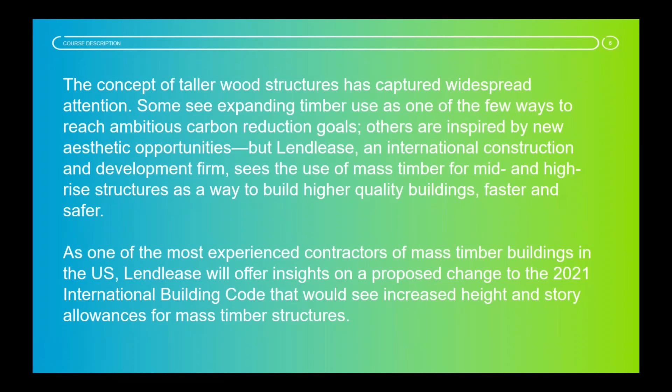So I'm with Lendlease, and we are a multinational company, and our North American headquarters are based in New York, and we do a lot of development, construction, and we do community development and infrastructure development and investment as well, all around the country, and predominantly in a lot of the large city markets, such as New York, Chicago, LA, San Francisco, Boston.

And here's a sampling of the projects of what we've done in the past all around the country, ranging from mass timber to the Statue of Liberty renovation, Citi Field for the New York Mets, the Grand Central Station restoration, Museum of Natural History, high-rise, low-rise projects, everything in between. Lendlease has developed and built quite a lot of those over the years.

And the next slide shows a location of where our offices are around the country, and I am based in Nashville as part of our Timber and Innovations Group, and we support all of the timber initiatives utilizing mass timber around the country for our regional business units. And then also our Nashville office is part of our P3 partnership with the U.S. military, where we have our privatization Army lodging program, and we service all of our military projects out of Nashville as well, with services from everything from design to development and construction.

The next slide shows a location of the projects that have either been completed or are under construction or about to be constructed utilizing CLT for the U.S. military. Two years ago, we completed the first CLT hotel in the United States at Redstone Arsenal. Last fall, we built a hotel at Fort Drum, New York, and then in October we will begin construction at Joint Base Lewis-McChord up in Tacoma, Washington. Next winter we will be in Fort Jackson, South Carolina, and then in 2020 we'll begin construction of several hotel buildings at Fort Bragg, North Carolina, all utilizing CLT as the primary structural material.

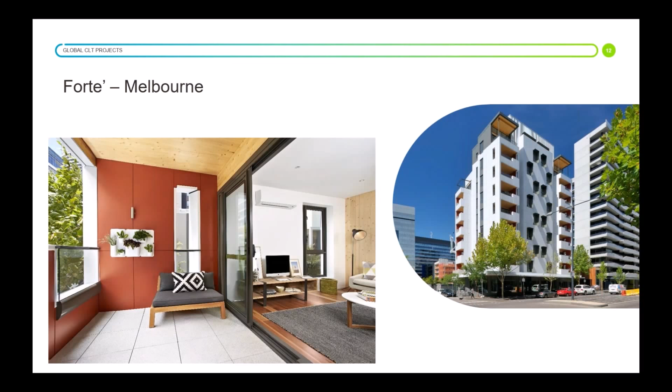And then the next picture will show a rendering of the penthouse with some stairs leading up to the roof. And you see the wood floor here, and this is not a CLT floor, this is a hardwood floor that has been added after we've built up the floor assembly for acoustics.

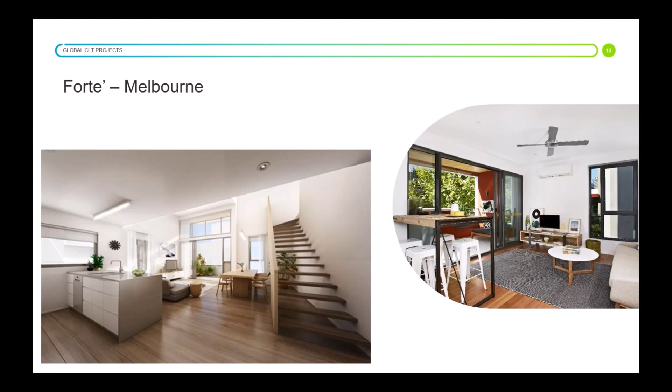But you can see for the most part, it's a very modern looking apartment with a lot of painted surfaces throughout. We did leave the occasional glulam brace exposed as an architectural effect for certain units where those were located, and you can see that on this picture as it finishes uploading here.

Apologies for the lag.

And then shortly after that, as part of our redevelopment in Melbourne, we developed and built a 3-story library and community center called Library at the Dock. And we utilized cross-laminated timber for the floor panels and the roofs. And we utilized glulam columns and beams as the vertical members to help support the structure.

And the picture you see on the left is the exterior, and that is a metal rain screen that is painted to look like wood, but that is not exposed timber on the outside. We expose the timber for the interior.

So between the development at Forte, where we use CLT for walls and floors, and then we opened up the space using columns and beams at the library, we all of a sudden had several different types of building structures where we could use it for different purposes for residential and office space and the like.

Here's a picture of the monumental stairs as they were coming in, and you can see an opening, an interior view of the books and the meeting spaces for the library.

And then over in Europe, we started to do multiple developments as well. We started to do a 6-story apartment building called Cobalt Place in London. And for the most part, everything was concealed with drywall there as well, but we did leave the underside of the floor panels exposed, and we put a whitewash stain on there for an aesthetic effect.

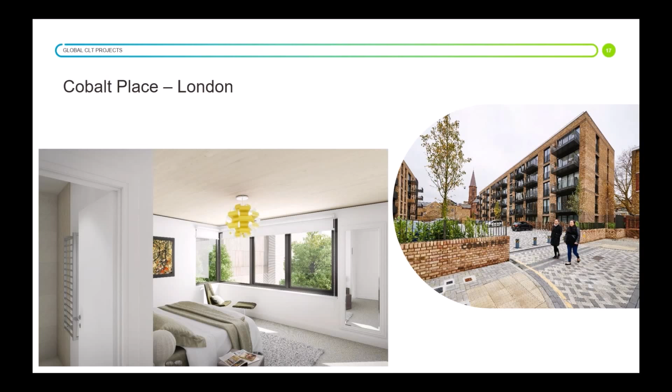But for the most part, this CLT was concealed, and it looked like most of your other typical buildings in that area. And then 2 years ago, we began construction on a project in Sydney of a 7-story office building out of mass timber glulam columns and beams with CLT floors, and it was called the International House.

And it was in the heart of the central business district with a lot of exposed glulam columns and beams. And we also developed that whole parcel of area around it with the high-rise concrete towers. And so Lendlease believes in utilizing all the different materials for a variety of different applications. And in the shadow of these large concrete towers, we have a smaller, more boutique office building out of mass timber, the 7 stories there.

And so some of the next few slides are going to be showing some pictures of it during construction when I was on site there to see how the pieces were going in. One of the advantages of this building was that it was lighter than concrete. It was on top of an existing parking garage. And so the loads imposed on the parking garage were less than if it had been a concrete structure, which gave this a valuable opportunity to utilize timber in this particular parcel of the entire development.

Here's another couple of pictures showing some of the knife blades for the connections of where the columns and the braces would connect as well.

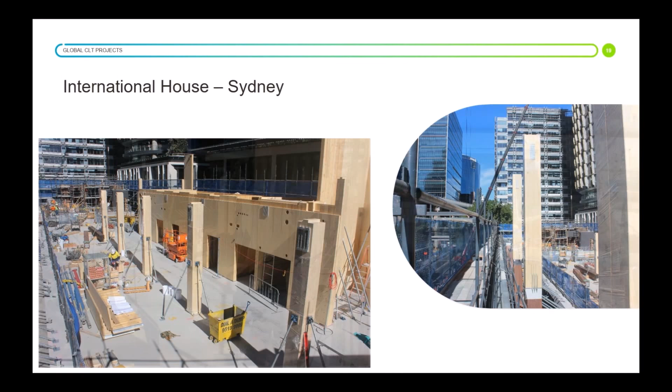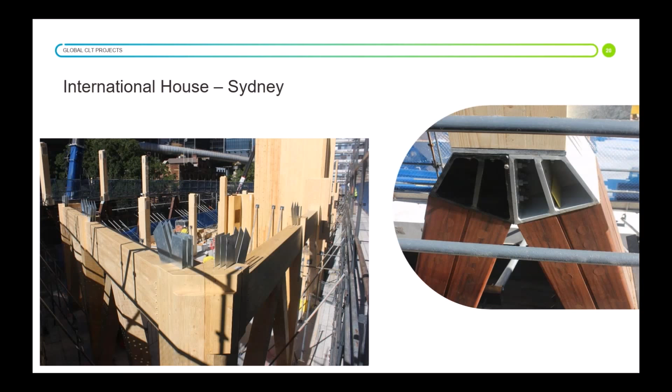But currently, right now, we're in the process of building a 10-story office building in Brisbane, which is considered to be the tallest commercial office building out of timber currently in the world at 10 stories, 9 stories of office over a 1-story retail, and it is on track for completion in November of this year.

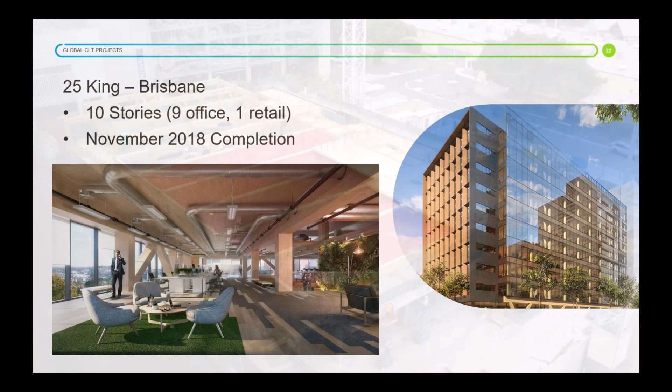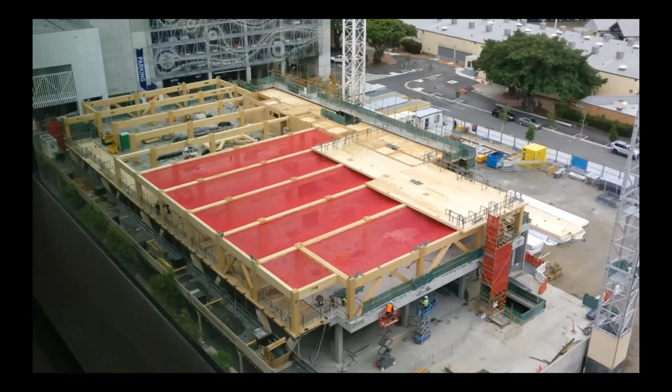There's a picture of the structural frame as it was going up a few months ago, with the floor panels going on top of the glulam beams. And the next picture is going to show you some of the pre-assembled wall panels being lowered into place. And you can see in this picture where the openings for the doors and the windows have already been pre-cut into the panels so that we don't have to do those cuts and openings in the field.

And then the next picture was taken just a few weeks ago as it shows the completion of the structural assembly with the glass facade coming up right alongside it. The building is on track for completion in 3 more months' time. And here, the next picture is showing an interior view of the completed portion with the exposed glulam columns and beams and the CLT floors.

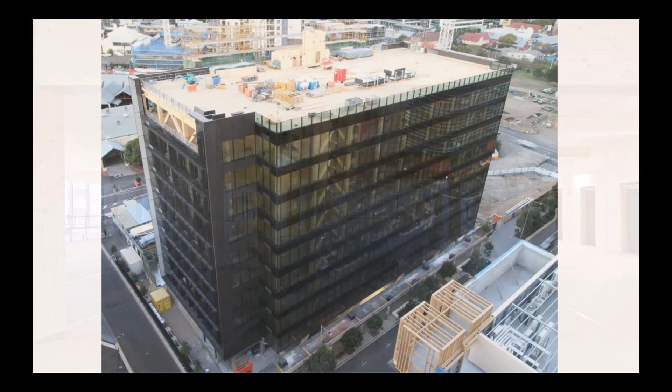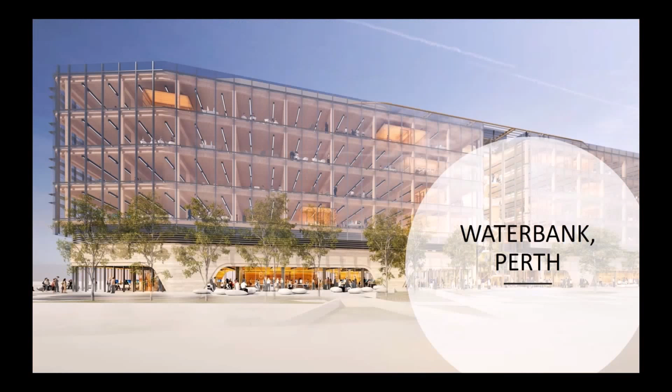Next year, we're beginning development of a $1.2 billion development called Waterbank in Perth, Australia, and at least 1 to 2 of those buildings will be CLT. And here's a rendering of the proposed CLT office building that will be going in there. This development will have a combination of concrete towers as well as some CLT mass timber structures sprinkled throughout, and this is what one of those buildings is intended to look like once it's fully developed.

And we're also beginning construction of a development in London called the Timber Yard with multiple high-rise timber residential structures with retail on the first floor in an urban infill project there.

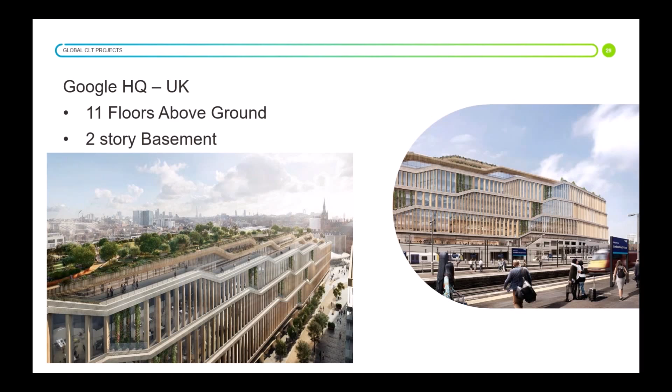But one of our most noteworthy projects right now is we've broken ground on the new headquarters for Google in London, and they are building an 11-story building. We will be building it for them with a 2-story basement, and it will utilize CLT for the floor panels and a lot of glulam columns and beams as well. It's near King's Cross Station in the heart of London, and it's going to be 870,000 square feet gross. And it's going to be our largest CLT mass timber project to date in terms of height as well as area.

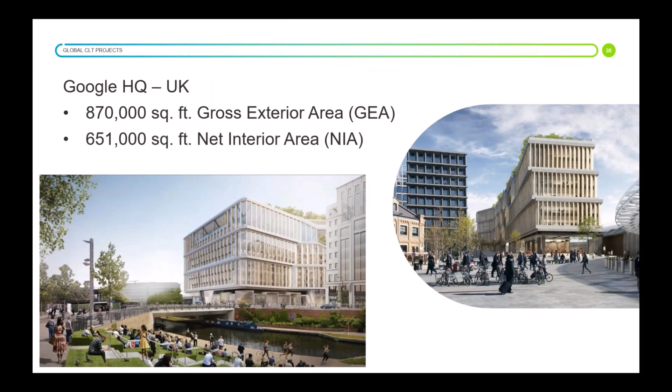Marcy, can you take it? Absolutely. So the international projects discussed, all of them utilize cross-laminated timber, CLT. Is it true or false?

So go ahead. I've got about 50% of you and about 15 seconds, so half and half. All right. Let's go. We've almost got 80%, so I'm going to go ahead here. Y'all seem to have stopped voting, so I'm going to go ahead and close.

And let's see, 92% say true and 8% say false. So I'm hoping that those 92% are right, Jeff. What do you say? Yeah, that is correct. All of them are utilizing CLT for the floor assemblies. Some of them are using it for walls, but often for the more open layout space situations, we will be using glulam columns for that.

So after seeing what's been done globally for Lendlease, we are not quite as ambitious to date with our current projects. But we started in earnest back in 2015 when we started to do the Redstone Arsenal Candlewood Suites hotel project. It's a 4-story, 92 key room hotel near Huntsville, Alabama. And it looks like a very generic looking hotel that you would see off the side of the highway interchange. There's nothing special about it.

Here we also completed with Woodworks. Woodworks applied for a grant, and we helped build 3 different CLT structures from 3 different North American CLT manufacturers, and we assembled those and put them at Tyndall Air Force Base, where they were subjected to multiple rounds of blast testing to see how CLT would perform in a blast environment.

And this was important for us because our hotels that we build on military installations are considered a high-value terrorist target. Ever since the 1983 Marine Corps barracks bombings in Beirut, sleeping quarters for soldiers and military personnel have been considered a terrorist target, where a devastating disaster at a building with soldiers in it could cause massive casualties. And so our buildings to house soldiers must be designed to comply with ATFP, anti-terrorism force

protection measures, and to resist progressive collapse in the event of a blast, such as a chemical fertilizer truck bomb in a parking lot, or a briefcase bomb brought inside the building. And so for the buildings to be blast resistant, we needed additional research to determine the performance characteristics of CLT in a blast, so that we could design the buildings to be a safe dwelling for our soldiers.

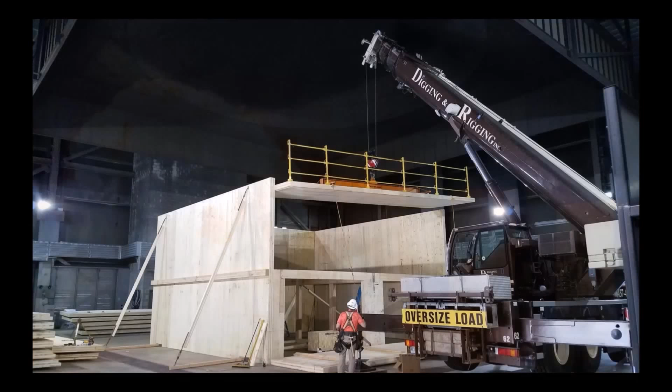And then in the spring of 2017, we partnered with the American Wood Council and assembled a 2-story apartment building test structure at the ATF lab in Washington, D.C. It was built out of CLT materials that would be used for a 10 to 12-story application. And we subjected the building to multiple different fire tests to see how it would perform. I'll go into a little more detail on that further into the presentation.

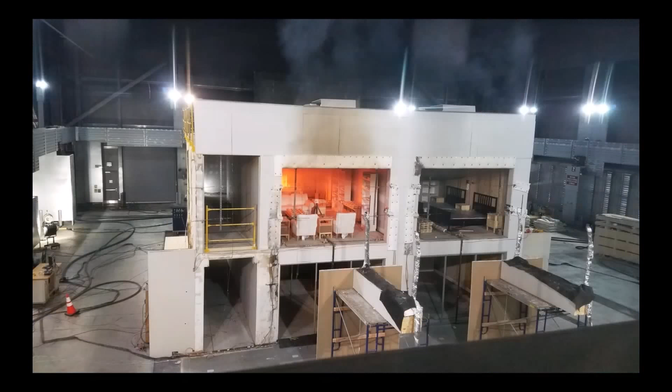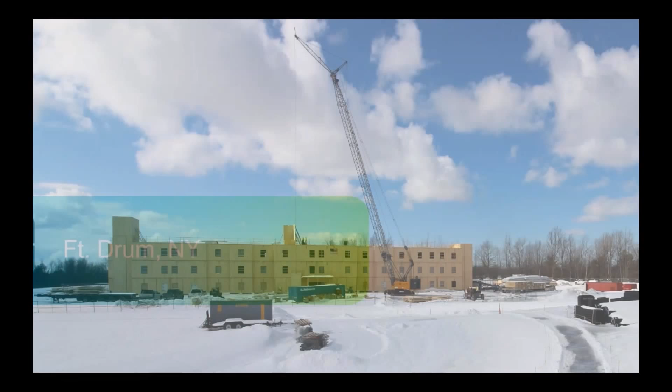So to date, we've done one hotel, several test structures for blasting, and a fire test as well. And from there, we moved on to Fort Drum, New York, where last fall we began construction on a 4-story hotel. If you've ever been to that part of upstate New York, it's about an hour and 15 minutes north of Syracuse, about 50 miles from the Canadian border, and 30 miles off of Lake Ontario.

And so we get subjected to lake effect snow a lot. We started construction going vertical in October on Halloween, and we finished in March. And I would never, ever recommend going vertical in upstate New York in the winter, where we dealt with 10 feet of snow and 15 to 20 inches of rain during that time. It was a tough building environment, but we were able to prove and validate that we could build CLT in any weather.

We just stopped working when the temperatures dropped below minus 15, and it wasn't because of the wood, it was because the workers' fingers were getting too cold to work below minus 15. And we would have to shut down when the winds whipped up off of Lake Ontario and would treat an 8,000-pound CLT panel like a kite when it was hanging off of a crane. So more of our delays were due to wind than to the cold.

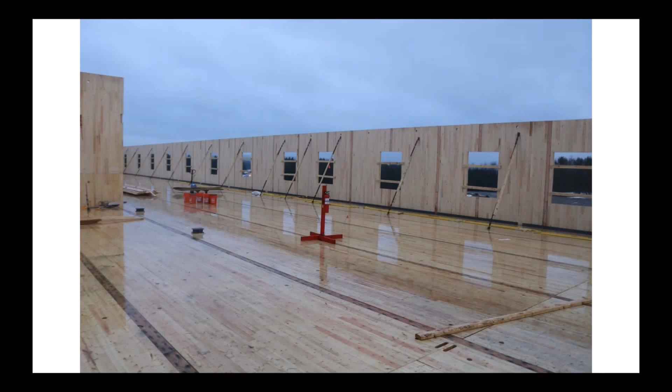But here's some pictures of the project on a cold, wet, rainy day in January, where you can see a sheen of water on the floor slab. This is, I believe, on the 3rd floor. You can see the exterior wall panels being braced up, the joints in the floor where the floor panels abut each other, and part of a shaft wall on the left-hand side.

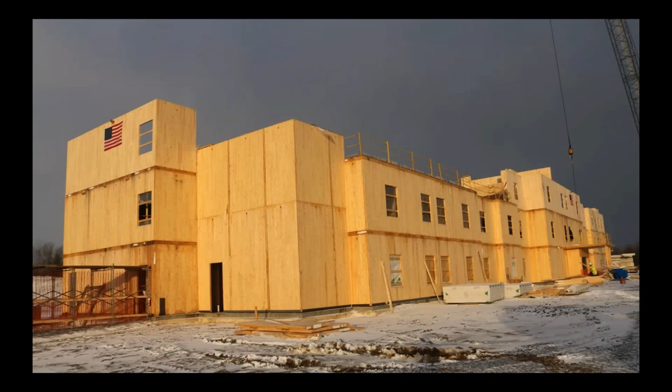And the next picture shows that same day as the sun was starting to set, and you can see the third floor walls going around the perimeter, the guardrails there, and the stair shaft walls on the far left-hand side.

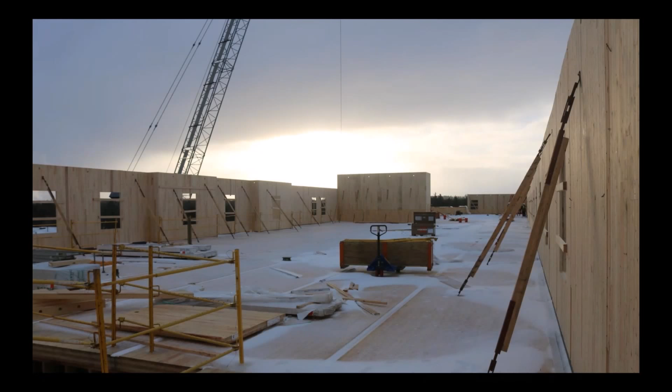And that day was about 38 degrees, and then the next day it dropped down to 12. And then we had a little bit of dusting of snow overnight, and so everything was always a little bit challenging when you woke up in the morning wondering when the storm system was coming through, what lake effect issues you might have. Because oftentimes we would wake up the next morning and be greeted by anywhere between 12 to 18 inches of snow on the structure.

So then we would have to spend a fair amount of time removing the snow just so that we could get back to assembling the structure and setting the walls into place. So much so that oftentimes we used our snow blowers more often than we used our hammers. That was the most valuable tool on the project, these two snow blowers to help us clear the snow. And we had over 120 inches of snow, 10 feet of snow, during our framing operations.

So today we've completed the one hotel at Redstone Arsenal, 4 stories, 92 rooms, and that was completed in 2016. And our pipeline of work is showing the future Fort Drum; the ribbon cutting is scheduled for this November. And we have Joint Base Lewis McChord, Fort Jackson and Fort Bragg in 2020. So we've completed 1 building so far. We have another 6 in the pipeline, for a total of 7 buildings with over 1,000 hotel rooms being built out of CLT over the next couple of years.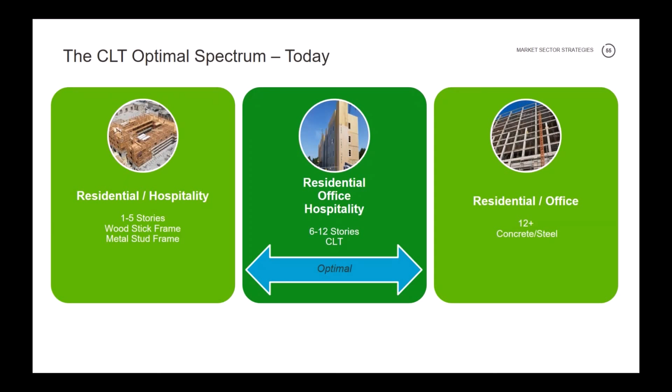Which brings us to our next question. Marcy. Here we go. CLT should be strongly considered when a project experiences which of the following conditions: labor scarcity, crane shortage, schedule constraints, all of the above, or answers A and C only.

Okay. About 10 more seconds. All right, I'm going to go ahead and close that up.

All right, so 79% say A and C only, 16% all of the above, and just 5% in the other answers. So let's see, Jeff, what is the real answer for us? So the answer for us today was E, A and C, labor scarcity and schedule constraints. The crane shortage is going to affect you whether you're doing a concrete or steel or CLT building, but the best answers for this would be the labor scarcity and the schedule constraints.

What we're finding is that CLT can be a faster medium than concrete, especially when you consider the fact that with a concrete superstructure, normally you're on your 4th floor before you can begin removing the shoring and reshoring from the 1st floor. And you have to be up so many stories in the air before your trades can really get to work after the concrete. And with the CLT structure, once your floor panels are down for that floor, you can immediately have subcontractors begin working underneath because there's no need for shoring or reshoring waiting for the concrete to cure. So we figure we can pick up a few weeks there on the schedule.

So one of the things we've been fortunately able to do is, over the last 8 years, we've been developing and building hotels for the U.S. Army across the country. And so we were able to compare the new hotels of similar size and shape to what we did at Redstone Arsenal. Most of our hotels were typically 4 stories and about 92 to 95 rooms. And when we compared the square footages of the previously completed projects against Redstone Arsenal, we found that our building was actually 14% larger.

This 14% increase was mandated by some programmatic decisions where they decided that the bedrooms needed to be bigger, with bigger interior space. They decided that the dining area, the common area, the lobby areas, and the back of house areas for operations all needed to be bigger than what we had built before. So when you added a few inches here and a few inches there to the different rooms, and you multiplied that out over all the bedrooms, all of a sudden your building footprint grew by 14%.

But when we compared it against metal stud construction, which was what we had always done in the past for the U.S. military for a blast-resistant application, we would normally have had a peak crew of 26 metal stud carpenters. And with us, we had a peak crew of 11 assembling the CLT superstructure. And that's where we thought we really had a benefit there.

Once we started to compare, that was a 43% reduction in employees, and we were also building the building 37% faster than our historical average doing metal studs. And we were 44% fewer man hours, and our structural production was up 75%.

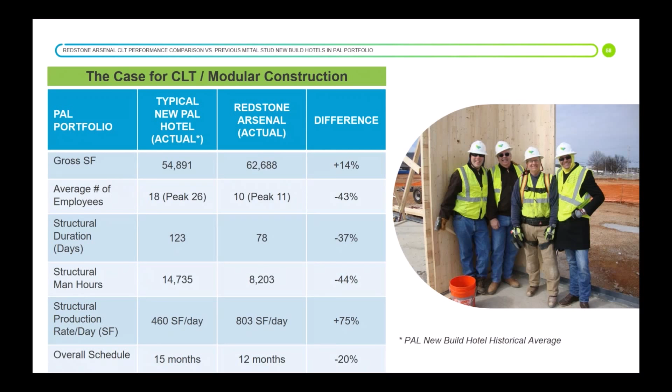So when we start to look at sustainability, we look at it across 3 different guidelines: economic, environmental, and social. And what we found when we did our analysis is that the CLT structure was 37% faster than our traditional metal stud construction for these blast-resistant applications, and it was also cost neutral to that.

And then with the thermal massing of the building and the VRF energy HVAC systems that we put in there, the building was actually 31% more energy efficient than our previous hotels of that same size. And the mass timber structure also sequestered over 1,200 tons of carbon, which we thought was a nice plus.

And then also it helped from a social sustainability perspective. I mentioned that we assembled the building with a maximum crew of 11 guys. Only 3 of them had been trained carpenters, and the other 8 were unemployed Army veterans that we hired through a job placement agency trying to get help for veterans. And we upskilled them in the construction trades.

And so we assembled that building in roughly 11 weeks with 11 guys, but only 3 trained carpenters. And the rest were former military veterans that we trained on the job to learn the product. So it helps us address the labor shortages that we're seeing in the industry, and it helps us build up our workforce where we have a definite deficit.

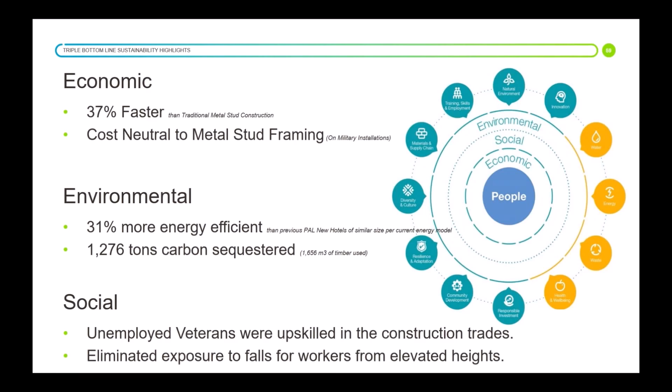We're at the very beginning. We're still learning, but we've learned a lot of good things, and we can make a lot of neat projects out of CLT, but I would encourage those who are looking to explore CLT to follow the KISS principle for right now and learn and grow. Do a crawl, walk, run approach as you work on your designs and do more, as you expect more out of the material, as well as the installers who will be putting it together.

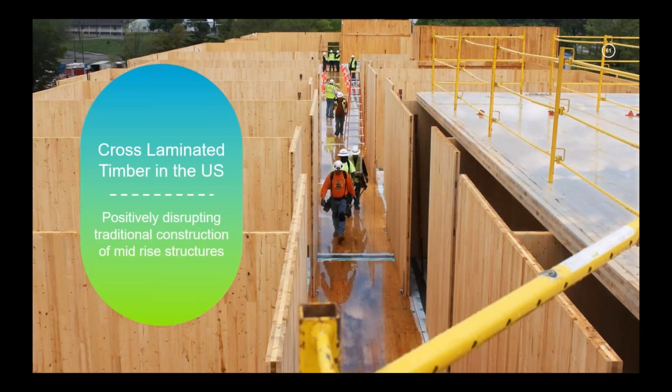Because from our perspective, CLT we think is a market disruptor in terms of the thought process as to how you design, build, and deliver a project, and it requires a whole different mindset and approach as to how you're going to do it.

And this is a picture from our Redstone project where you can see our corridor walls were CLT. They were 3 inches thick. Our demising walls were 4 inches thick between the rooms, and then we also had CLT floor panels that would be 8 feet wide by 50 feet long, and they would span across multiple hotel rooms. And so we have a 400 square foot panel of floor set every 10 to 12 minutes, and you can see the guardrails already there for our guys.

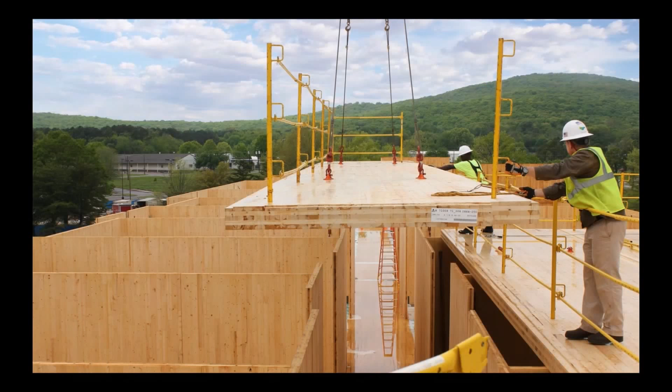Here's a picture showing the project as we were putting in another floor panel. You can see the guardrails are already in place, and our workers are working safely from height and eliminating the exposure to falls.

As you can see in this picture of the panel going in, it's about an 8,000-pound panel, 400 square feet, and we were setting those about every 12 minutes, sometimes 15 minutes, depending. But you can see the panel's already in there with the guardrails, and the workers are already working from a safe environment.

So we start to look at what's next in the industry. What are we trying to do? How is the industry moving forward? So in the spring of 2017, we began assembling a 2-story apartment building test structure at the ATF Research Lab in Maryland, utilizing a North American CLT manufacturer.

And these are elements that were built for a building that would be for a 10 to 12-story application. And each floor represented an apartment with a kitchen and the living area in one room, and then you had a sleeping area in the other room. And we had mirror images of the same thing from each floor to the other. And then on the 2 sides of the building, we had a corridor that wrapped around as a hallway.

And on the roof, if you look closely, you can see tanks that are filled with water to simulate loads of other floors that would be above it for a 10-story application, so that you can see how the building was being subjected to those forces in the event of a fire. We couldn't go any taller than 2 stories because that's as tall as the exhaust fan would allow us at the research lab. So we did everything we could to simulate the building loads and what the fire conditions would be.

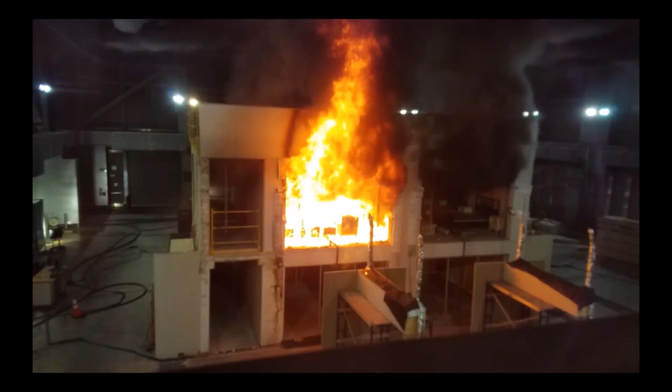But in this test here, you can see a view of the fire starting in the kitchen, and then a few minutes, I believe about 10 minutes later, the entire living area is consumed. And then a while after that, the fire spreads over, and you have flashover into the other sleeping area.

And the purpose of these tests was to see how the fire would behave in a CLT structure. Would the fire go from one floor to the next? And it didn't. And would it go into the hallways and cause any other issues there? And it didn't. And in most of these tests, we left the windows out. And most of the time, we let the fire self-extinguish and burn without applying any water or sprinklers.

But we did simulate a few of those to see what would happen. And when we did activate the sprinklers, the fire damage was minimal, especially if the sprinklers are activated at the first detection of the smoke, or if we did a delay, the damage was still quite minimal.

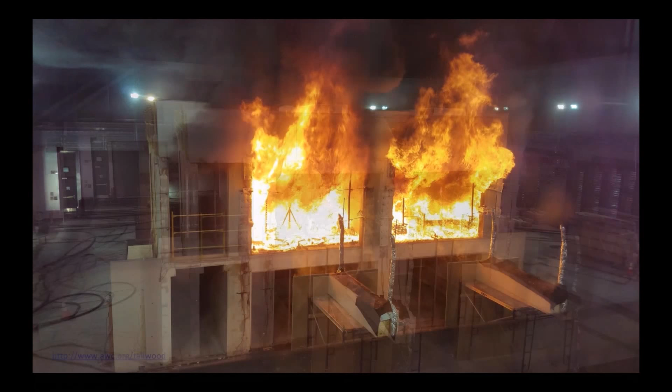But in this particular fire, we didn't activate any water protection. And several hours later, all the contents of that room, of that apartment, had been self-extinguished. They consumed all the flammable materials, except for what you see a flame on the far right. On the far right, that wall was a CLT wall that was left exposed, just to see how an exposed wall would do under the fire. And so several hours into the fire, we had that. But with no sprinklers activated, this is what the fire did.

And there's a lot more information about this report, all these different tests and how they perform. And all this information was gathered by the American Wood Council, and they've summarized it, and they have it on their website at awc.org/tallwood. And it talks about all the 5 different tests, all the scenarios that were run, what were the results.

This was the most heavily sensored fire test conducted by the ATF lab in their history. There were over 300 sensors in this 2-story structure to see exactly how the heat transfer worked from room to room and from floor to floor. And you had thermocouple sensors placed at different thicknesses into the wood to see, if the CLT panel was on fire on the interior face, what was happening to the heat of the CLT panel 1 inch in from the fire, 2 inches in from the surface, 3, 4 inches in.

And so we captured all of this data to see how well wood was as an insulator from extreme fire, extreme heat temperature changes. If it was hot on the inside, what was on the other side of the wall. And we found out that the wood worked very, very well.

So these test results, combined with a variety of other tests that have been conducted over the last few years in North America, between Canada and the United States, were forwarded and collected together, and they were submitted to an ad hoc committee that was sponsored by the ICC. There was an ad hoc committee to explore the idea of going for taller timber buildings after seeing what was happening in Europe as well as in Australia. Could the ICC develop a framework of proposals and regulations to allow for taller timber buildings, and how would that be done? So these test results, as well as the fire test that you just saw, were gathered to the committee.

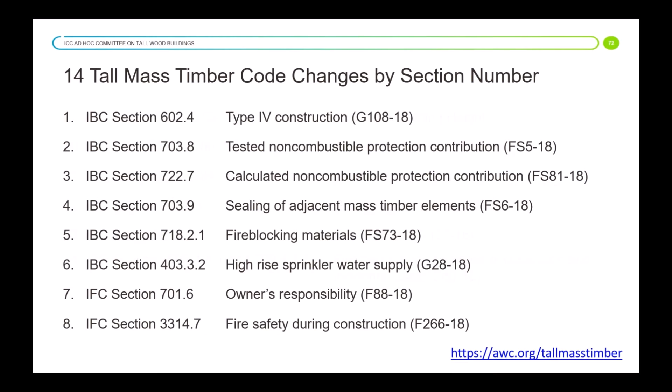The Tallwood Building Ad Hoc Committee proposed 14 different changes to the building codes, and the first 8 you see are listed here, to all the different sections, and then you see the remainder of those 14, where a variety of different parts of the building code were going to be changed, from allowable building height, area, and number of stories, all the different parts that make up the building code. This is where the revisions were proposed for the different tables and data.

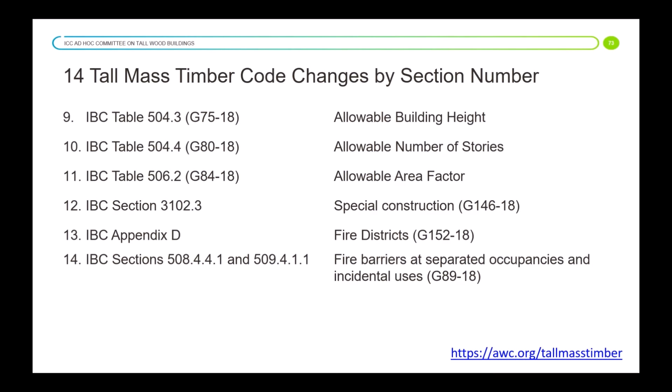And this is all detailed in much further detail on the awc.org website, /tall mass timber, far more detail than we can go into on this call. So when we look at the ICC procedure, there are 8 steps in the I-code development cycle. On January 8th, the ad hoc committee submitted their final proposed language to the ICC, and then it was up for public viewing.

And then in April, there was a committee action public hearing held on this in Columbus, Ohio, for a variety of different officials from around the country, and advocates testified in support of these proposals. They also heard those who were not necessarily in support of this. There was a floor discussion, and the committee voted nearly unanimously, with one dissenting vote, in support of the recommendations proposed by the Tallwood Building Ad Hoc Committee. The recommendations were sound. They were based in logic and science with a lot of testing to back it up, and the committee here also agreed with it.

So after that hearing, the proposed changes went back out for public viewing again, and those public comments will be posted at the end of this month. There will be public hearings in Richmond, Virginia, the last week of October, and then in November there will be online voting of registered government building officials on these proposed measures. They were all prepared by the ad hoc committee, then voted and approved by the ICC committee, and now the general voting public at large has an opportunity to vote on this. And then hopefully in December, the announcements will be posted via cdpACCESS as to whether this passed.

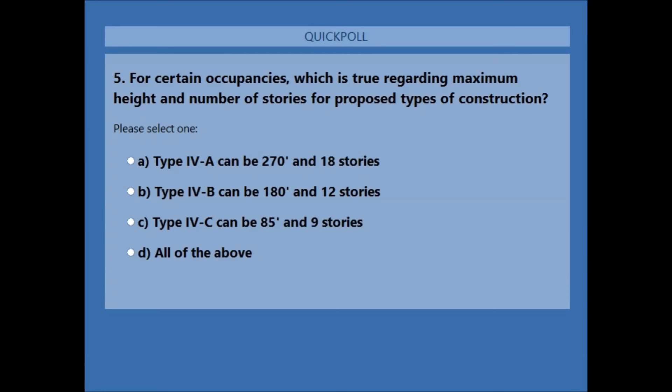All right. Okay. Not so many people are voting for this one, so I'll give you just a couple more seconds. And I'm going to go ahead and close. All right, there we go. It was delayed there a little bit.

All right, so 80% say all of the above, 10% type 4C, 85 feet and 9 stories, and 9% 180 feet and 12 stories, but no one says 270 feet and 18 stories. All right, Jeff, let's find out what it really is. And the answer is all of the above.

Now that said, C is a little bit tricky because we just found out after we did the webinar this morning that a committee modification changed it to 85 feet and 8 stories. But the ideal best answer was supposed to be D, all of the above. Those are all the categories of the heights and stories, with the exception of the clarification to type 4C.

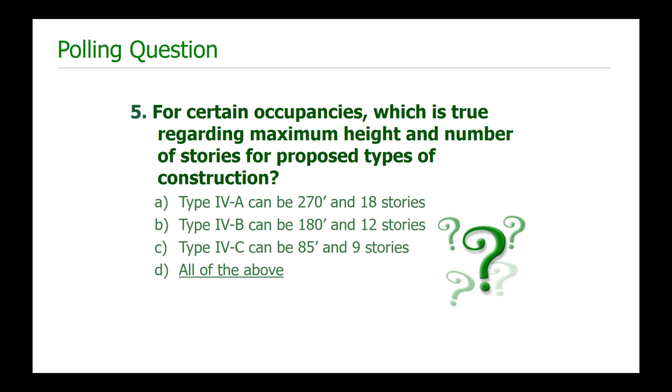But where I think the big change is going to be in the built environment, in terms of how we view CLT, is when we see it like this. When we see it as a common, everyday building material that can be used for a variety of applications. It's not going to be the perfect application for every project, but it is something that you can do.

And that will work for a lot of people and a lot of needs. CLT, mass timber, we think can work for a variety of applications in terms of hospitality, residential, office space, business space, a variety of different things like that. When you see it as a more common material, not necessarily a boutique material, it doesn't have to be flashy. It can just be a rudimentary structural material like we see steel and concrete.

So this upcoming detail that you should see here will show the exterior wall assembly of what we were trying to do there. We had, for this application, the hotel, all the exterior walls in CLT. We didn't use a glass facade around the perimeter like a jewel box there. And when you use CLT for your exterior, the CLT works really well with a variety of different facades and materials. And in this case, we utilized brick. Red brick was the prevailing material for what they wanted to use at Redstone Arsenal. Most of the buildings there were red brick, so we did the same thing to blend in.

We did the built-up assembly there. You can see a steel angle there supporting the CLT. That steel angle was to provide a mounting system, a perfectly flat system for the CLT to rest on the concrete, because the CLT is built to a much tighter tolerance than the concrete could ever be poured in the field. And also it gives us a flexible connection for a blast event so that the steel can move a little bit and flex in the blast event for the CLT and transfer those forces down. So you can see a picture there showing how we did the build-up of the exterior wall assembly.

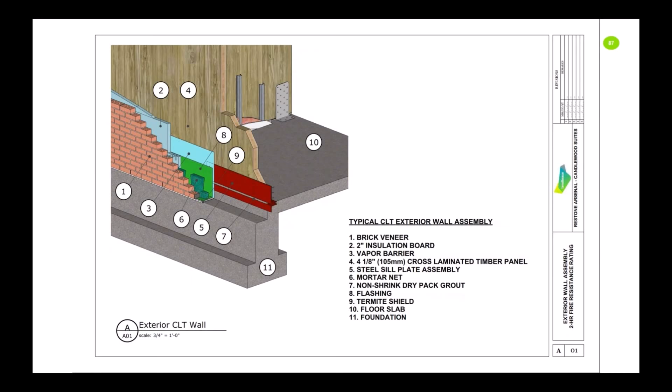And then the next picture is showing how we furred out the walls to allow for two things: for your electrical conduit, for shallow boxes, for your electrical boxes, your thermostat wiring, and also for your insulation, for your noise, for your acoustical performance. So we did 1.5-inch stud furring there, with mineral wool insulation. And with that, we had quite a good STC performance for the walls. The walls are supposed to meet an STC of 55, which in the field we could test a few points less than that. And in the field, we actually tested 5 points above. So we tested at 60 in the field, and the building was actually quite remarkably quiet. But you can see how we furred out the walls there.

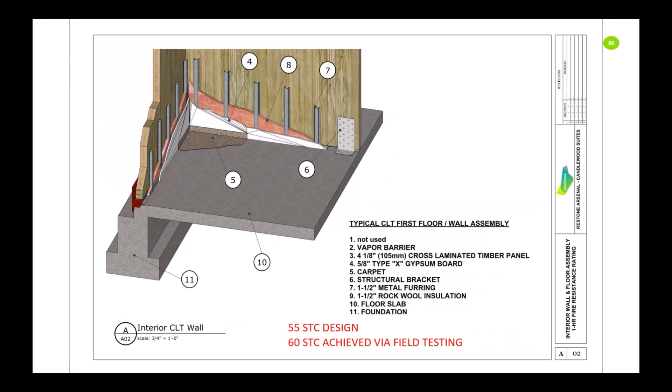And then the next picture is showing how we did our drop ceilings. We went very conservative for this one 3 years ago, where we put a layer of 5/8 Type X underneath the CLT floor assembly, a 7-inch CLT floor slab. In some cases, we direct applied the Type X drywall to the underside of the slab, and other times we furred it down a little bit, as you can see in this picture. And then we had a further drop ceiling at 9 feet for the sleeping areas and 8 feet for the foyer and the bathrooms. Our floor-to-floor height, I believe, was about 11 feet, and then we dropped the ceilings to get down to 9 feet and 8 feet. And you can see that assembly there.

What we found out was the STC assemblies for the floors tested at 61 in the field when 55 was the design requirement, and then the IIC was really quite exceptional; we scored a 72 in the field, where a 60 was designed. The next slide you will see shows how we built up the CLT floor.

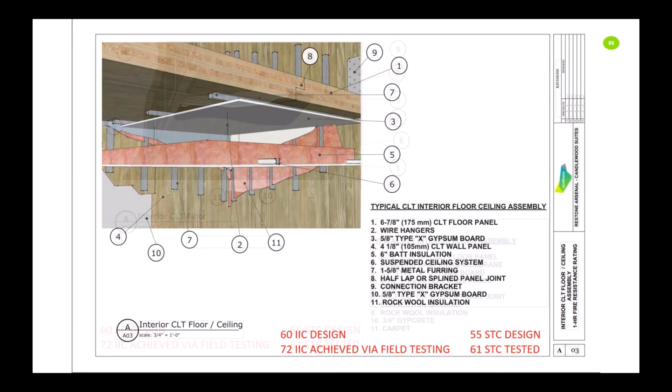We put the 7-inch CLT floor assembly, and then you had an Acoustimat followed by a gypcrete, the 3/4 inch gypcrete, and then we put a carpet in on the sleeping area on top of the gypcrete, or we put the resilient flooring in the entryway foyer. So with that assembly on top, and then with what we did with the drop ceilings down below, we had quite a robust acoustical performance so that you didn't really hear your neighbors.

And our Army client really appreciated that. You couldn't tell it was a CLT building from the outside or from the inside because everything was encapsulated. But once you were inside the building for a little while, you realized it was a little bit different from your traditional hotel because it just seemed that everything was so quiet. And that was a really nice benefit for our soldiers, especially since they're not staying there just for one night or 2 nights. They could be staying there for a couple of months at a time for their training. And so that was something that the Army really started to value.

So those are our details in showing how we built up the assemblies for the walls and the floors. You don't want to have everything exposed because it will present some acoustical challenges, but you have to be judicious with where you want to expose and what you don't. And then the building code framework proposed for 2021 also helps give you the framework for how much can be exposed depending on how tall you want to go with your building.

Great, great. So you mentioned connections a couple of times. Talk a little bit about proprietary versus standard connections. And then I've got a specific question about the knife plates that you showed in one of the projects and whether they used self-tapping screws for those knife plates.

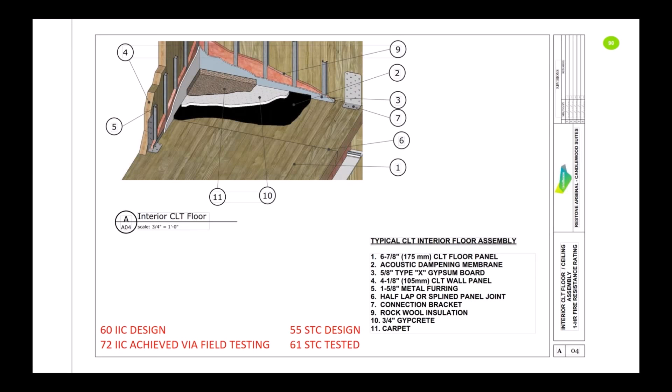It opens up a lot of sites for us that had been previously difficult to develop and build on when you try to figure out where you're going to put your parking lots with the constraints of where your streets are and your underground utilities that you may not be able to build over. And now we have something that could be faster and cheaper than concrete, with a lot more flexibility than if we had done it out of metal studs. And previously for our hotels, we did not build out of wood studs. We built them out of metal studs because of the blast performance requirements and the setbacks that the metal studs could allow us. But now CLT is better than that. So we like that extra flexibility that it can give us in certain options and markets.